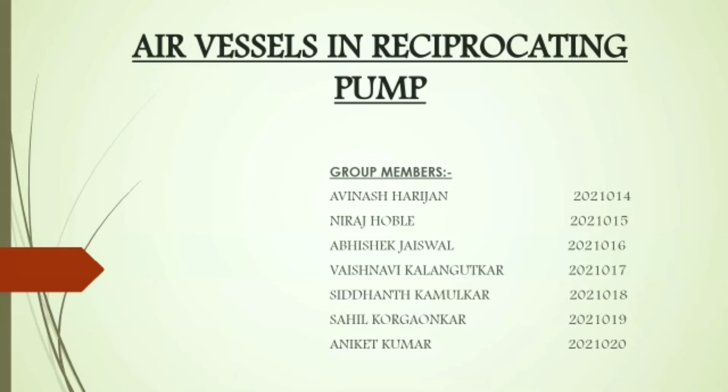Hello everyone, I am Vaishnavi Kalangutkar, along with my group mates Avinash Harijan, Niraj Hoble, Abhishek Jaiswal, Siddhanth Kamulkar, Sahil Korgaonkar and Aniket Kumar, here to present on the topic air vessels in reciprocating pump.

Reciprocating pump. It is one kind of positive displacement pump, and it is known as such because in it the liquid is pushed out of the cylinder by the actual displacement of the piston or plunger. Reciprocating pumps are more suitable for lower volumes of flow at high pressure.

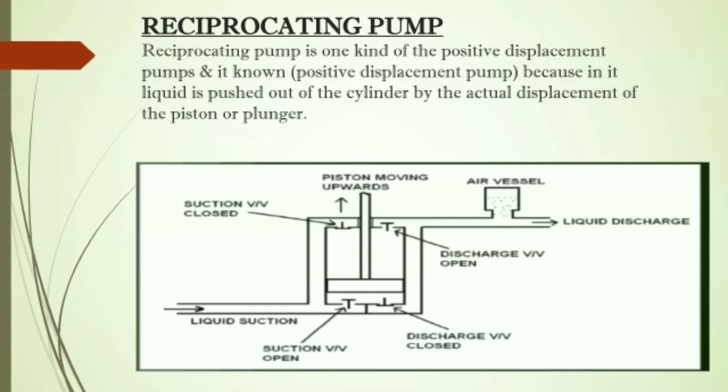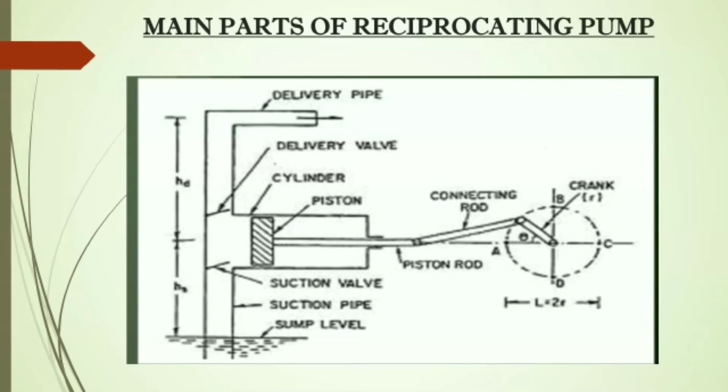Main parts of reciprocating pump: delivery pipe, delivery valve, cylinder, piston, suction valve, suction pipe, sump, connecting rod, piston rod, and crank. Cylinder. It is a hollow cylinder made up of cast iron or steel alloy and it consists of the arrangement of piston and piston rod. The movement of piston is obtained by a connecting rod which connects piston and rotating crank.

Suction pipe. The main function of the suction pipe is to collect the water from the sump and send it to the cylinder via a suction valve. The suction pipe connects the water sump and the cylinder. Delivery pipe. The function of the delivery pipe is to deliver the water to the desired location from the cylinder.

Suction valve. It is a non-return valve, meaning it can take the fluid from the suction pipe and send it to the cylinder but cannot reverse the water back to it. In this sense, the flow is unidirectional. This valve opens only during the suction of fluid and closes when there is a discharge of fluid to outside.

Delivery valve. Similar to the suction valve, a delivery valve is also a non-return valve. During suction, the delivery valve closes because the suction valve is in the opening condition, and during discharge, the suction valve is closed and the delivery valve is open to transfer the fluid.

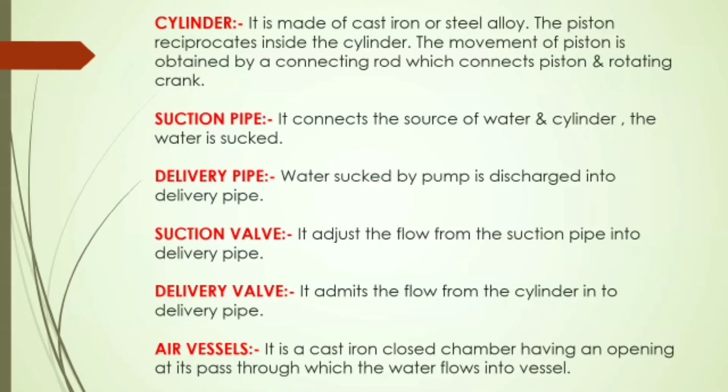Strainer. It acts as a mesh that can screen all the dirt, dust particles, etc. from the sump. If there is no strainer, then the dirt or dust also enters into the cylinder, which can jam the region and affect the working of the pump. Heads of reciprocating pump: suction head, delivery head, frictional head, and total head.

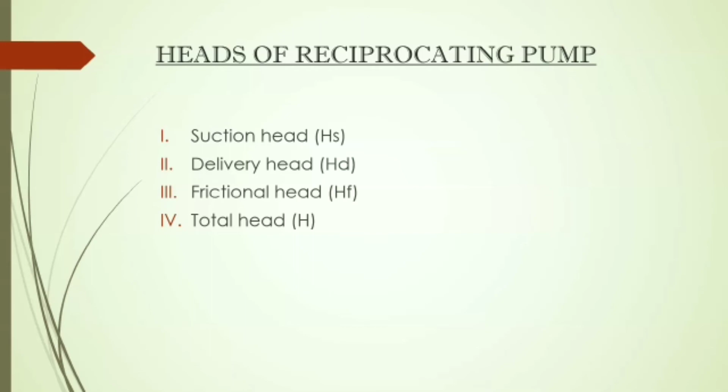Suction head. It is the vertical height from the surface of liquid in sump to the center of pump. Delivery head. It is the height to which the liquid is lifted above the center of cylinder. Frictional head. It is defined as the losses of head due to frictional resistance. For frictional head, the formula is hf = 4fLV²/2gd.

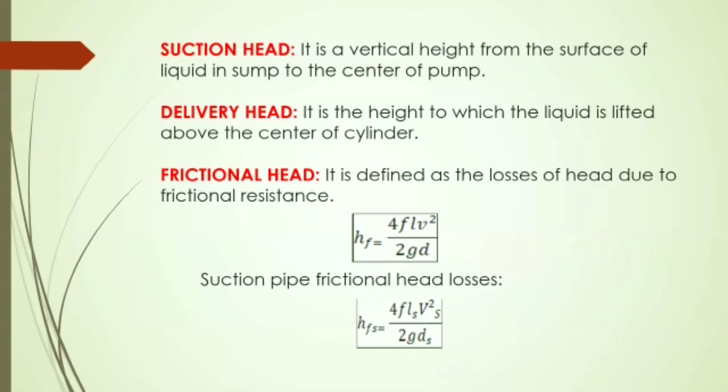This formula can be applied according to different situations. If we are calculating frictional head for the suction pipe, it will be denoted by s, that is hfs = 4fLsVs²/2gds. For the delivery pipe, frictional head loss will be hfd = 4fLdVd²/2gdd, where f is the frictional factor, L is the length of pipe, that is Ls and Ld, V is the velocity of liquid, that is Vs and Vd, and d is the diameter of pipe, that is ds and dd.

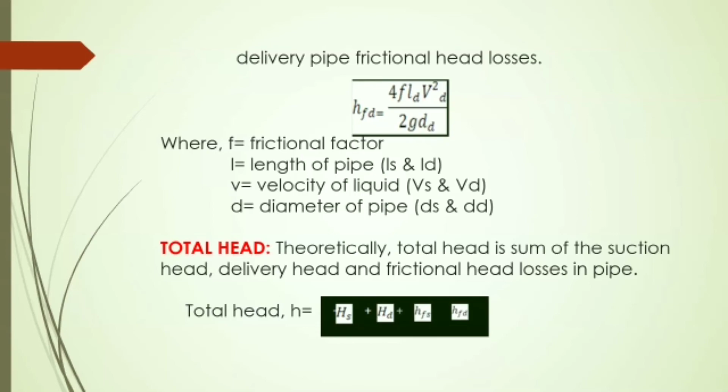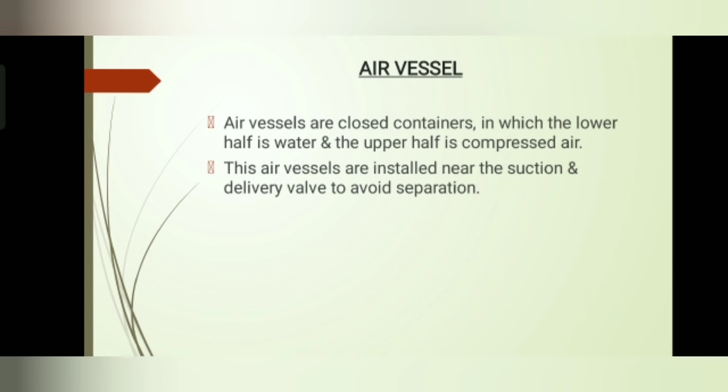Total head. Theoretically, total head is the sum of the suction head, delivery head, and frictional head losses in pipe. Total head H = Hs + Hd + Hfs + Hfd. Air vessel. Air vessels are closed containers in which the lower half is water and the upper half is compressed air. These air vessels are installed near the suction and delivery valve to avoid separation.

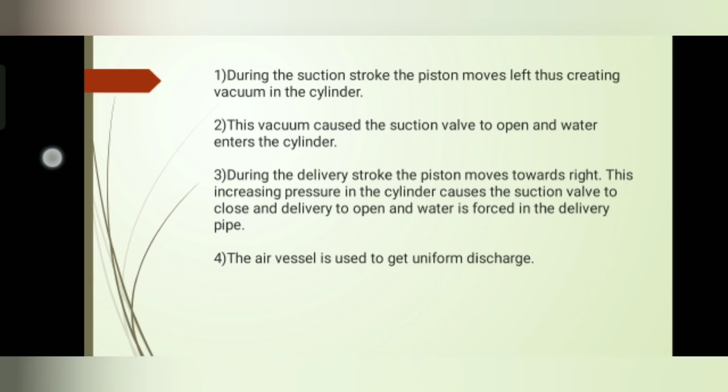Significance of air vessels in reciprocating pump. To obtain liquid at uniform discharge. First, due to the air vessel, acceleration head and friction head decrease. Second, the work required to overcome the friction resistance in suction and delivery pipe decreases. And the last one, the reciprocating pump can run at high speed without flow separation.

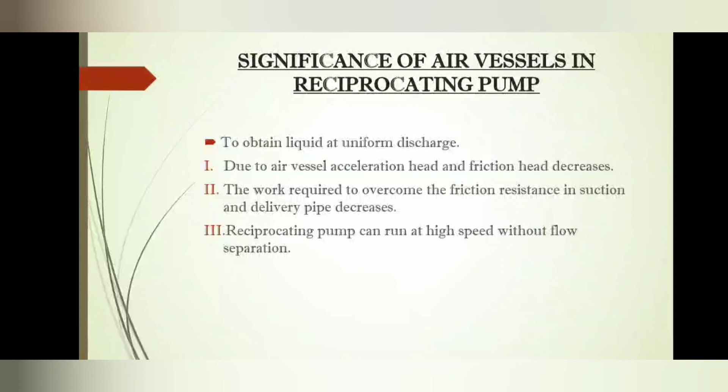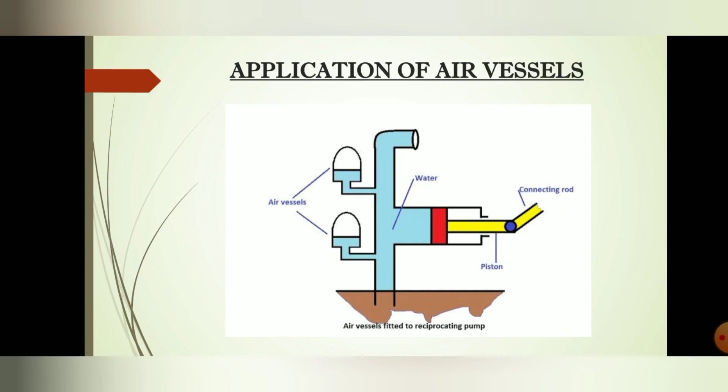Application of air vessels. Here is the diagram of air vessels fitted to the reciprocating pump. An air vessel is fitted to the suction pipe and to the delivery pipe at the point close to the cylinder of a single acting reciprocating pump to save a considerable amount of work in overcoming the frictional resistance in the suction and delivery pipe, and to run the pump at a high speed without separation.

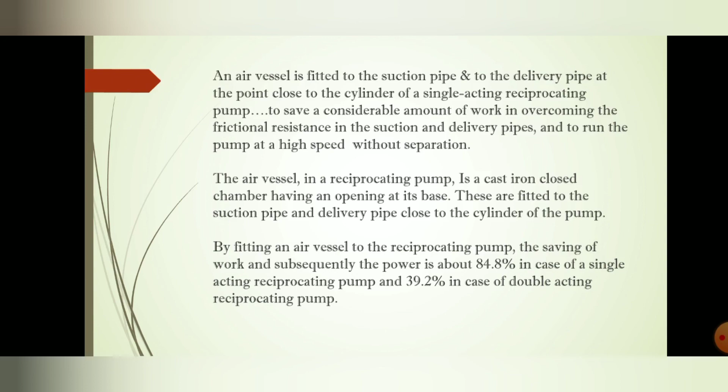The air vessel in a reciprocating pump is a cast iron closed chamber having an opening at its base. These are fitted to the suction pipe and delivery pipe close to the cylinder of the pump. By fitting an air vessel to the reciprocating pump, the saving of work and subsequently the power is about 84.8% in case of single acting reciprocating pump and 39.2% in case of double acting reciprocating pump.

Advantages of air vessel. The flow fluctuation is reduced and a uniform flow is obtained. The friction work is reduced. The acceleration head is reduced considerably. It enables the use of high speed.

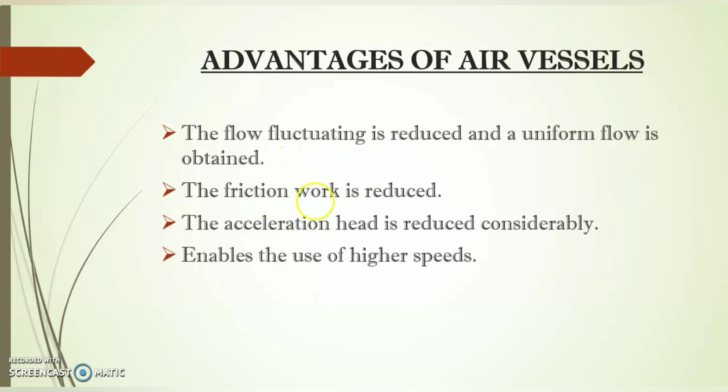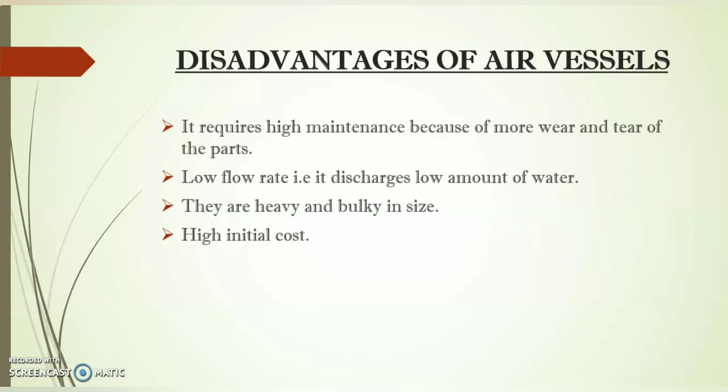Disadvantages of air vessel. It requires high maintenance because of more wear and tear of the parts. Low flow rate; it discharges a low amount of water. They are heavy and bulky in size. High initial cost. Thank you.